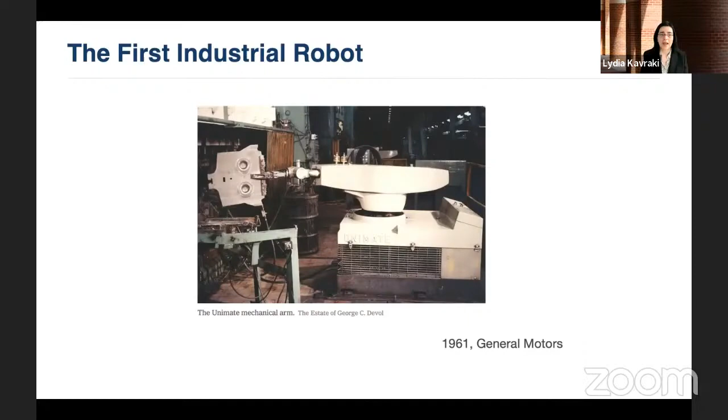However, the concept of automata is a very old one, about 3,000 years old. In the Iliad, Hephaestus, the god of metalworking and fire, created automatic tripod carts to deliver nectar and ambrosia to the gods and goddesses on demand.

Talos is also attributed to Hephaestus. A mechanical colossus made of bronze was imagined in the Argonautica. Talos patrolled the shores of the island of Crete, throwing boulders at invaders.

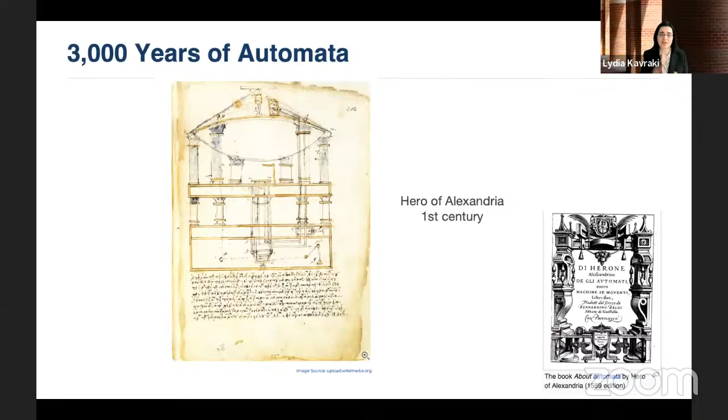In his treatise Automaton Making, the mathematician engineer Hero of Alexandria describes a fully automated puppet theater that through a combination of displaced grain, axles, levers, pulleys, and wheels could enact an entire tragedy.

Fast forward to the Renaissance, Leonardo da Vinci drew up plans for a robotic knight operated internally by weights and pulleys. In the 20th century, when industrialization became a reality, the word robot was coined in the 1920 play R.U.R., Rossum's Universal Robots, by Czech writer Karel Čapek.

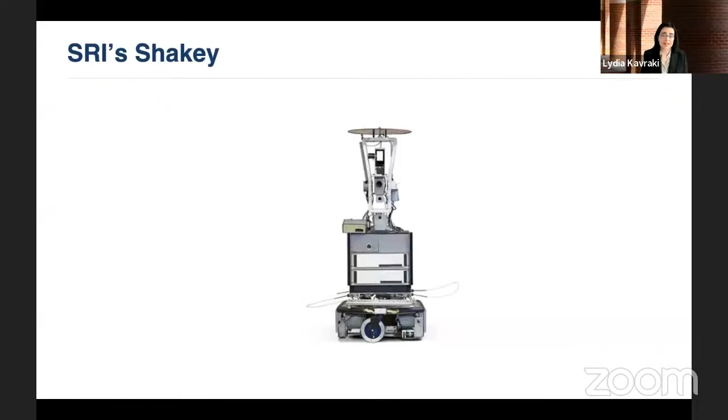Shakey was the first mobile robot with the ability to perceive and reason about its surroundings. The subject of SRI's artificial intelligence center research from 1966 to 1972, Shakey could perform tasks that required planning, route finding, and the rearrangement of simple objects. The robot greatly influenced modern robotics and AI techniques, and now it resides in the Computer History Museum.

Today, robotics is one of the most disruptive technologies. Robots have already made great inroads in the automotive, semiconductor, manufacturing, and fulfillment sectors. Robotics is now poised to transform virtually every societal sector, including national security, agri-food, maritime, environment protection, infrastructure inspection, emergency response, logistics, transportation, healthcare, entertainment, and the arts.

So the transformative power of this technology has prompted several reports and roadmaps in many countries, and I will encourage those of you who are interested in the topic to have a look at them. From Internet to Robotics, a roadmap for US Robotics, 2020 edition, followed earlier roadmaps in 2013 and 2016 in the United States and was a collaborative effort of several roboticists from academia and industry.

The Robotics in the AI Era, a vision for a Hellenic robotics initiative executed under the auspices of HIAS, the Hellenic Institute of Advanced Studies, which co-sponsors this webinar, speaks more to the Greek idiosyncrasies and reality.

From the HIAS report, I quote, "The global robotics market was valued at $62 billion in 2019 and is projected to reach $189 billion in 2027, growing at a compound annual rate of 13.5%. The market grows to 15.7 trillion by 2030 if artificial intelligence is considered."

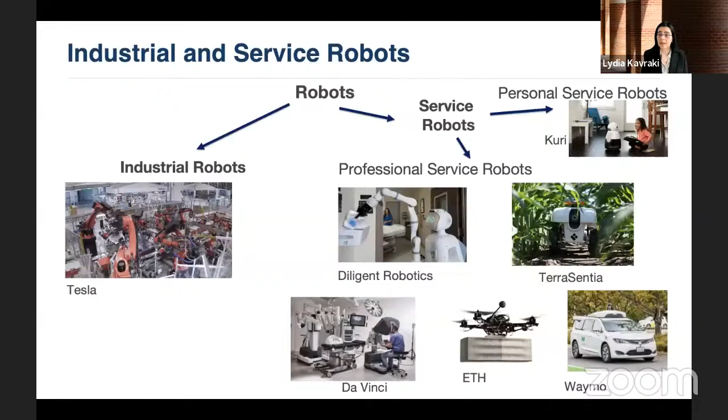Robots can roughly be divided into two main categories: industrial robots and service robots. Industrial robots are used primarily in the automotive, semiconductor, and manufacturing industry. Service robots can further be divided into personal service and professional service robots. Personal service robots include home robots and entertaining robots, while professional service robots include medical robots, robots for agriculture, self-driving vehicles, unmanned aerial vehicles, and others.

Again, from the HIAS report, contrary to industrial robotics, which is rather mature, the service robotics sector, unmanned aerial vehicles, healthcare, logistics, and agri-food robotics is in its infancy and fast rising. Professional service robots is a 27 billion market worldwide and is growing at an annual rate of 30%. Furthermore, 20% of all service robot companies are young startups. This creates an exciting opportunity for aspiring Greek innovators to enter this young and fast-growing field and modernize the economy towards Industry 4.0.

In this very short webinar, we have asked outstanding Greek scientists of the diaspora who work in robotics to give us a glimpse of their work and the things to come. We have also asked the Greek technologists and leaders in the industrial sector to discuss their efforts in Greece.

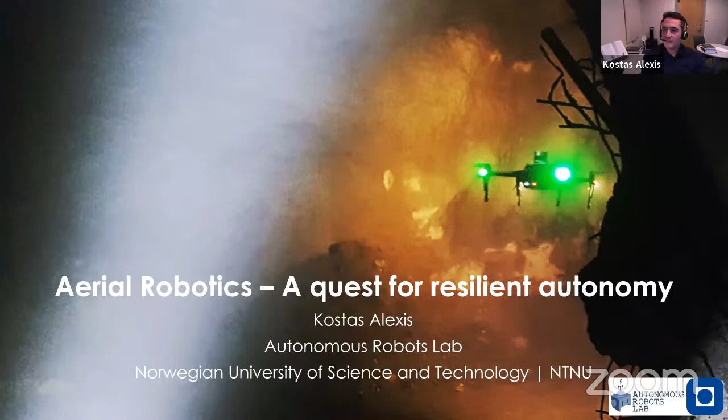I'm going to discuss aerial robotics, and I'm going to make the claim that the key aspect, and I think Lydia before outlined this also, the key aspect for service robots of that type to be ubiquitous relates to a set of challenges, and the part of the work that I want to focus on today is how we enable autonomy and a resilient autonomy in these conditions.

Flying robots are now employing diverse configurations, from classical multi-rotor systems, as we are all familiar with now, what we typically call a drone, fixed-wing systems with long endurance, custom designs specific for industry, and so on and so forth. But they are tasked to operate in very diverse and challenging conditions with perceptual degradation and other limitations that hinder the ability to operate autonomously.

If I was to make a plot of what aerial robot autonomy relies upon, I would say it has to have three features: robustness, in terms of having the same performance across conditions; redundancy, in terms of actuation and sensing, being able effectively to have the ways to operate against every error and in every condition; and resourcefulness, the ability to find a solution despite the challenges faced in all the other loops and functional subsystems.

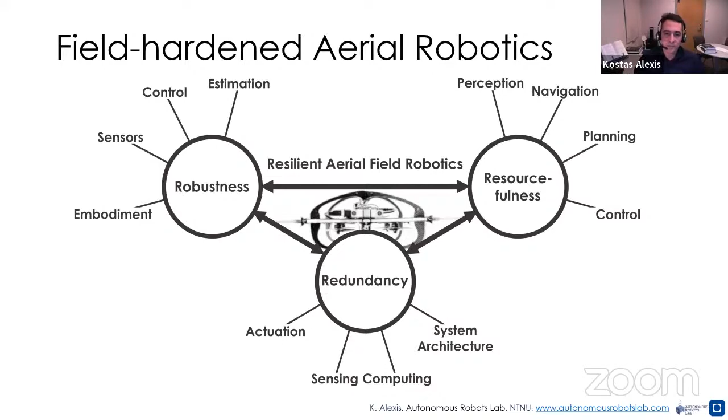It's massive. But they also have low texture and visual obscurants. They can be dark, they can have smoke, they can have dust, and so on and so forth. There is no access to communications. So we're really talking about autonomous systems. I'm going to present the main part of the work that relates to our contributions, but the whole context is made through a large team and international collaboration that involves many partners.

And the name is inspired by ancient Greek mythology, so it's called Cerberus, by the protector of the underworld. I got to know through this endeavor that actually underground domains are particularly important for the world and the society, and also very diverse. So we have tunnels and tunnel-like environments such as mines that give us the resources, urban underground infrastructure that allows us to transport, and of course, the magical world of cave networks.

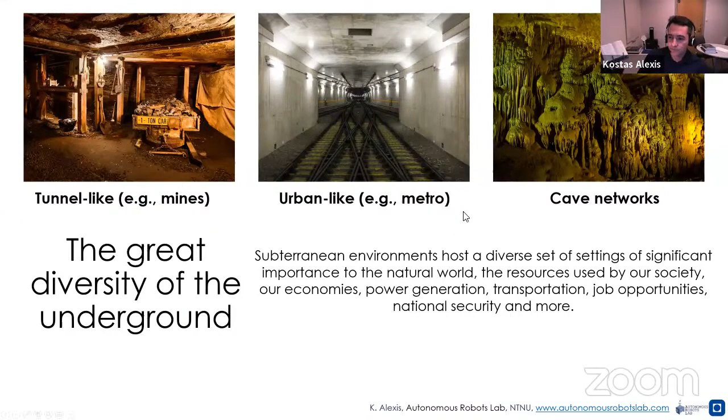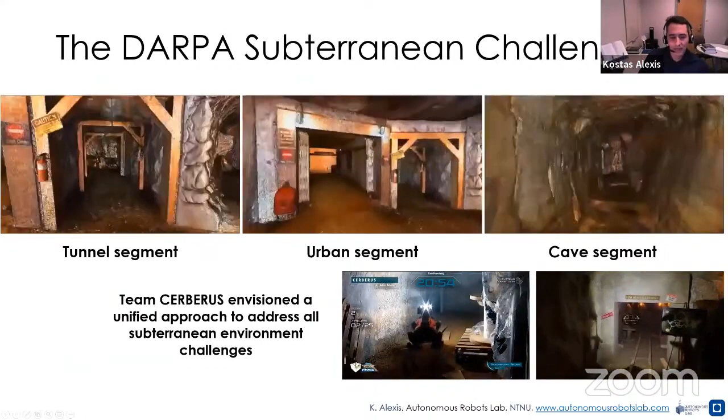DARPA, the US Defense Advanced Research Projects Agency, implemented a challenge analogous to the previous, like the DRC and the Urban Challenge, where robots had to explore and map and find objects in this type of diverse environments. In the final event, teams were tasked to explore parts that look like an underground mine, parts that look like an underground urban environment, and parts that were part of a natural cave. And we deployed a system of systems involving flying and legged robots. Legged robots were based on our collaboration with the team from ETH Zurich.

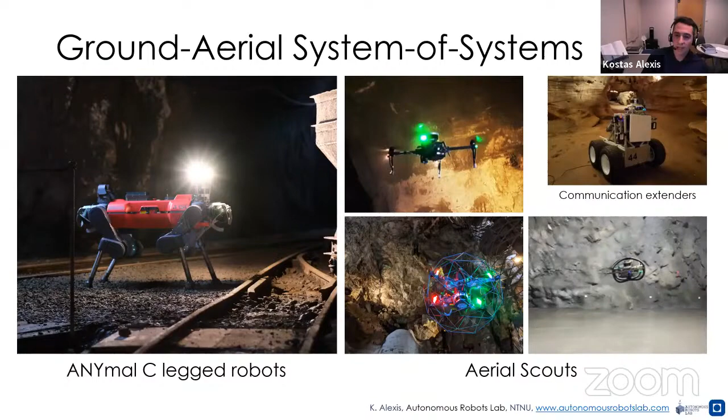To approach the problem, we think it's necessary, and this is what I want to coin here, that you need to perform holistic research across the domains of dexterous design of robotic systems and agile flying robots, resilient perception, resilient autonomy, alongside the remaining task-specific work such as detecting objects or enabling, of course, communications throughout. That's a picture of the systems we deployed in this competition. And again, I focus here on the flying part, although the legged robots played a particularly important role at the final event of the competition.

Flying systems, speaking in terms of what are the core challenges, I think there are three. The embodiment has to be resilient, perception has to be resilient, and autonomy has to be resilient. A key aspect in our experience that allows for resilient embodiments is to make a design that is forgiving to last resort errors that can always happen. For example, in very confined environments, we can always collide a little bit with the world. So collision tolerance and other compliant designs are the means to facilitate such resilience.

And if such a design is available, then we can build upon the more important functional autonomy loops that allow it to operate on its own, search, characterize, and explore unknown environments. These are some instances from previous robots of my team. People, of course, traditionally have worked for a long time on control systems, flight control for these systems. And in my team, we employ a particular methodology called model predictive control.

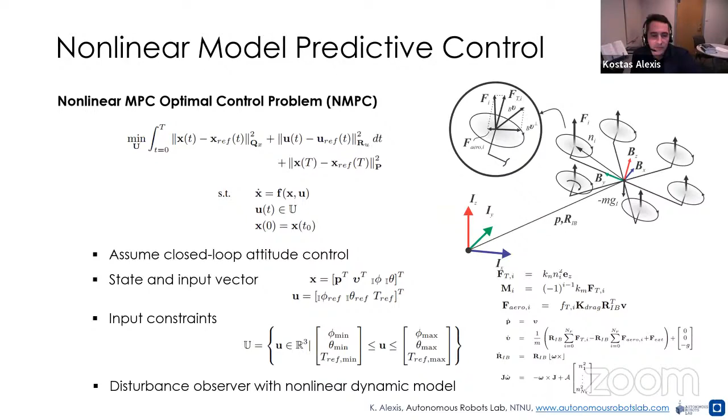Beyond control and embodiment, I mentioned perception is a key challenge. GPS-denied navigation is something that colleagues in the research community have explored heavily, either using LiDAR sensors or visual cameras and so on. My focus the last years on this topic related in particular to what we call perceptual degradation. What we faced in the Subterranean Challenge, but also in other conditions especially relevant to industry in the real world, is that robots do not operate in environments that are benign with simple features and good visual conditions, but they can be simultaneously GPS-denied, dark, low texture, with smoke and fog and mist, geometrically self-similar, multiple kilometers in size, but at instances extremely narrow.

To allow resilient localization and mapping based purely on onboard sensor data for flying robots, we have developed a multimodal localization and mapping pipeline that first of all implements the sensors, which is a lot of effort in the hardware, as Lydia mentioned, to miniaturize everything for a small flying robot, to be able to see through degraded conditions. And here you see the benefits of thermal navigation, where the robot is unaffected by the presence of strong clouds of dust around it.

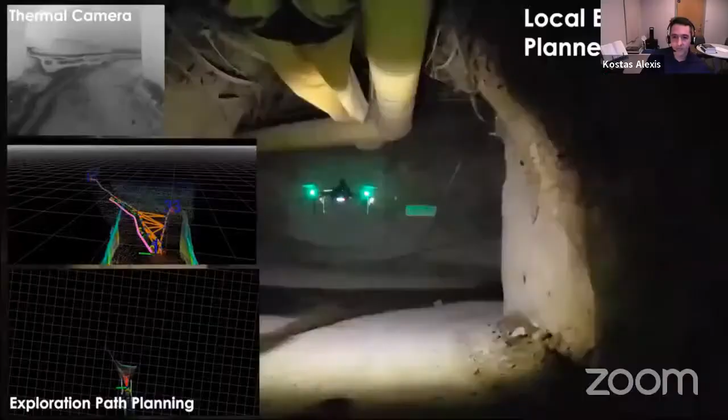ability to exploit the agile dynamics of flying robots, which can seamlessly navigate through the 3D space, and do so in a manner that works for a single system, but also works for a team of robots that have to undertake this exploration mission and mapping as a team, collaboratively.

These are instances of these results where you see one of our flying robots exploring an underground mine in Nevada. And you see the thermal data and the LiDAR data. And these pink paths are the paths that the robot has identified to navigate on its own in order to explore the remainder of the environment. And the robot eventually, by the end of the battery life, makes sure to come back to its origin and deliver the data to the people that wait for it outside the underground mine.

This methodology in perception and in path planning was the core, the autonomy core of Team Cerberus, and in the final event of the DARPA Subterranean Challenge allowed us to win the competition, a result that I'm proud of, not for myself mostly, but for my team as a whole, which managed to compete and win against teams from NASA and MIT, Carnegie Mellon, and others who had an inferior score in the last phase of the competition. And this was truly a big challenge for systems walking or flying to be resilient and autonomous throughout, and it involved 3 challenges with different geometries at any time.

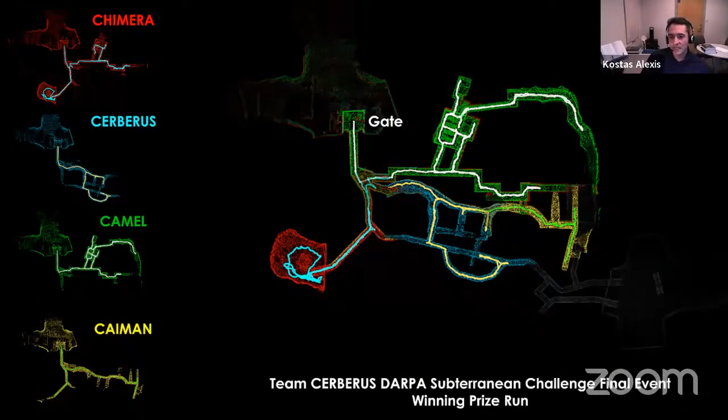In this map that allows us to see the whole picture, you see 4 robots with 4 names: Cerberus, Chimera, Camel, and Caiman, taking paths in this complex underground topology and exploring these worlds. And eventually they deliver the map, but also the location of objects of interest in this map. And just for what it's worth, you get a point in the competition for detecting an object correctly, reporting back the location with an error of up to 5 meters. So it was a task about navigation in austere conditions, mapping and detecting objects of interest.

And the combination of walking and flying reflected the fact that ground systems, of course, have endurance, walking systems have dexterity against some terrain, but at the end of the day, when you have to go vertically up, get the bird's eye view, you also need the flying systems together. So that was a team that involved multiple robots, and this is the whole combination of robotic systems that Team Cerberus deployed through the 3 years of the competition.

I want to close my talk highlighting that remote observation and mapping or search for objects is one thing that flying robots can do. It's really not the only one. And what you see in these videos is that we can, of course, exploit physical interaction to navigate through very confined environments.

We are recently running a project that allows to go through very narrow manhole settings where a human actually is able to navigate by just squeezing his shoulders, or to manipulate physical objects in the environment with a flying system. This is maybe not the most conventional application, but actually, if you think about it, it's very natural to the natural world, with birds, of course, being able to manipulate and interact with their environment.

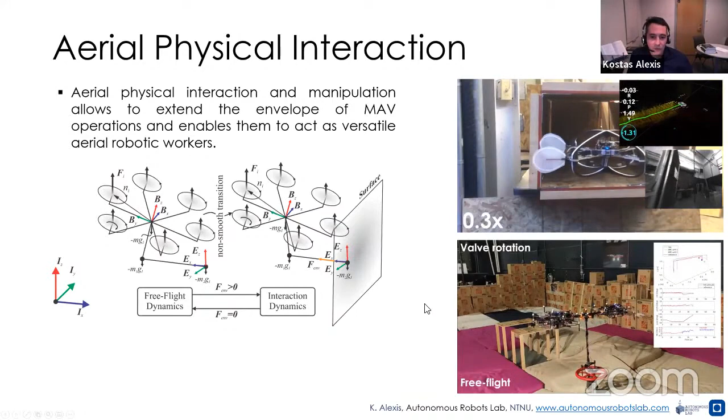And of course, beyond small flying systems, I have to give credit to the period of the research that I was at ETH, together with my team back then, when with traditional fixed wing designs, glider, we demonstrated the ability of a system to fly during the day, charge its batteries with solar panels, and sustainably cross the night, and then fly the next day, and the next day. And eventually we call this the idea of perpetual flight.

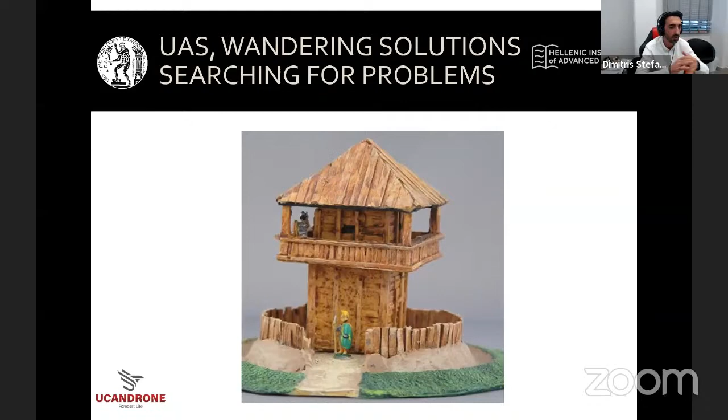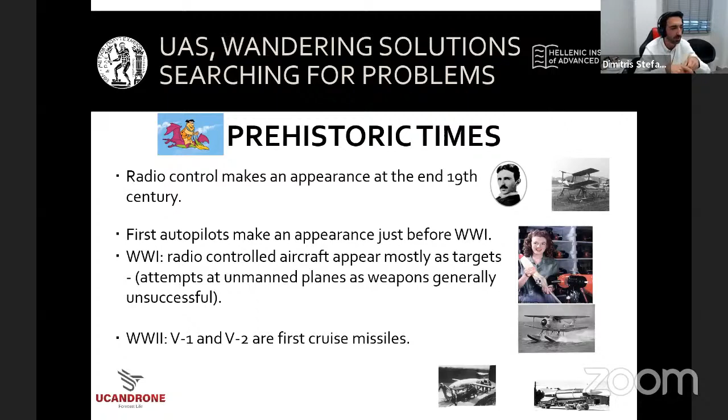So we had some prehistoric times. The lady on the right, if you don't know it, is Marilyn Monroe handling a propeller from a target drone. Well, the first attempts in the 19th century were, again, the defense industry playing with cool toys doing bad stuff. But after that, we have some medieval times where, after the war ends, the remote control hobby became mainstream.

And actually, if you think about it, today's drone scene is largely a continuation of this tradition, but with better electronics, of course. Like every history, we have the Renaissance. In the 90s, GPS became mainstream. We have the mobile phone hype, and of course the internet facilitates the open source movement, or at least I can send a colleague of mine a message and they can answer. But we're not there yet.

Why? Because we have the age of enlightenment, and of course we can get hands-on some real energy. Because of the battle of mobile phones, we have inertial and other sensors and GPSs that are small enough and cheap enough to use. And for the first time, last but not least, we have processors that we don't use for heating ourselves, but they can actually process.

So around 2005 or 2009, somewhere in the middle, we start having all this hype about drones and all this open source initiative for flying drones, for USVs or UXVs in general, that we can play with, use, or make a hobby out of. And of course, academia embraced them and started to use them a lot.

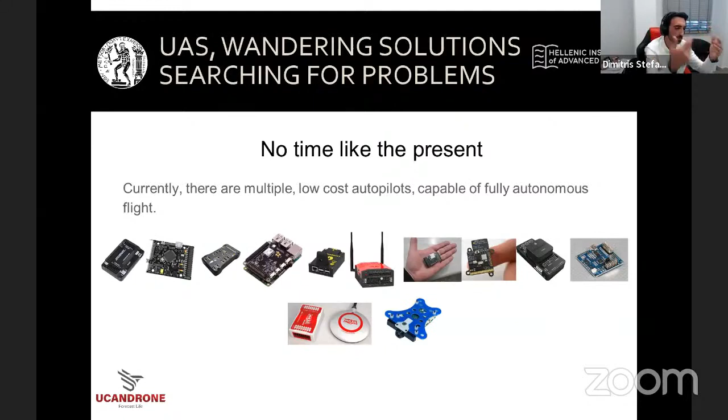So as I said in the beginning, there is no time like the present. Nowadays, we can get hands-on with whatever device you can imagine. You can have sensors of any kind, and you can just imagine a solution and make it the other day. But after this perfect storm, we sat down and started narrowing down to the tool, not the solution.

We heard about coding, AI, and buzzwords like machine learning, etc. So we narrowed down to the code, or we said, of course, we need more miniaturized electronics and better sensors, etc. Or guys like me said, okay, none of you can do anything if you don't have a beautiful shiny platform like mine. And everybody looked at his discipline without looking at the solution. And once we found this panacea, we handed it to everyone who's willing to pay for it.

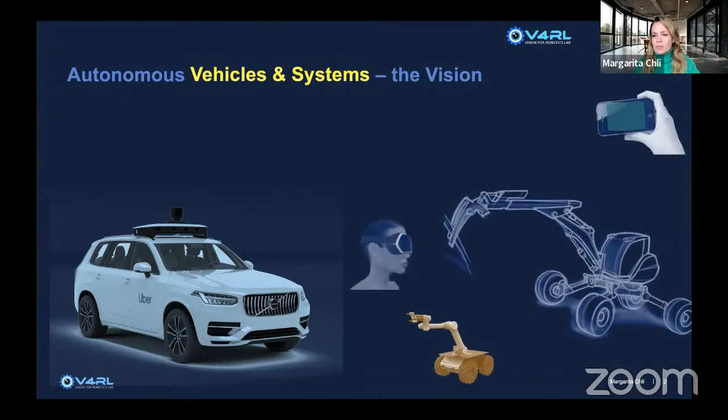Good, so I'm going to talk about autonomous vehicles and systems with vision, and the pun here is intended to mean both orasi and orama, so both machine vision and vision for the future with respect to this topic. Now, when you hear autonomous vehicles and systems, I bet most of you think about autonomous cars. But I would like to open up your horizons to think a little bit broader about what kind of vehicles and systems we are working with. There are so many other robotic platforms that one can think of.

And at the Vision for Robotics Lab, we are aiming to basically use the onboard sensors and the onboard computation in order to automate their navigation in space. So we want to develop this robotic perception and intelligence for platforms such as the ones that you see here, in order to enable their safe navigation in space without colliding with their environment and actually performing a useful task.

And the vision would be to take this a step further, even to have a portion of this team, or all of it, if you would like, to collaborate in a team to perform a common task together. Now, again, a team like this or a sub-team of such platforms, you can imagine that it can be very helpful for different tasks. Whether one wants to digitize an archaeological structure, to have a team to help in search and rescue, or to inspect the power plant or monitor crops, then robotic perception and systems can have a lot of impact and have a lot to offer.

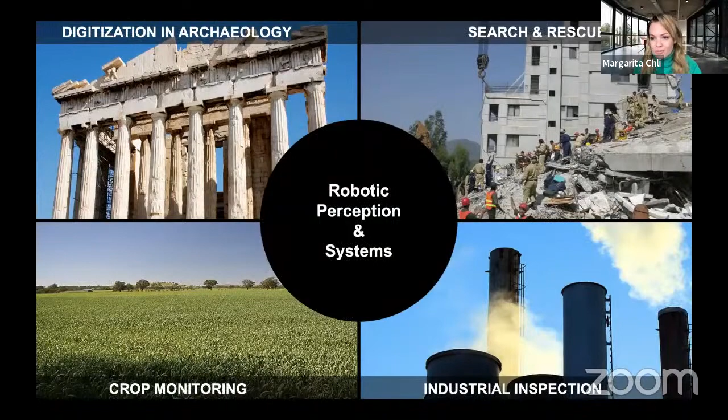So back to our vision. So in order to achieve this vision, to have a team like this that is able to assist us in tasks as the ones that I showed before, then we have quite a few challenges to address. And for the purposes of this talk, I've partitioned these challenges into three main topics, basically. And these also represent the three main research streams in my lab. So I'm going to go through them and explain what I mean by these challenges and give you a taste of some of the works that we are doing to address them.

Right, so what do we need for our autonomous vehicles and systems? First of all, we need them to be able to robustly estimate their ego motion in space, and also estimate what this space, what this scene looks like. Then we want them to build on top of that a level of intelligence, if you'd like, to perform scene reconstruction such that they can interact with their scene, and also path planning in order to perform a mission like drive from A to B autonomously.

And once we have robots able to address challenge 1 and 2, then we would like to exploit the fact that multiple robots might be deployed to perform a common task in order to do multi-agent collaboration. Okay, right. So let's look a little bit into what we mean with ego motion estimation. I'm glad most of you have knowledge of Greek, so you can understand what ego motion means just by reading that.

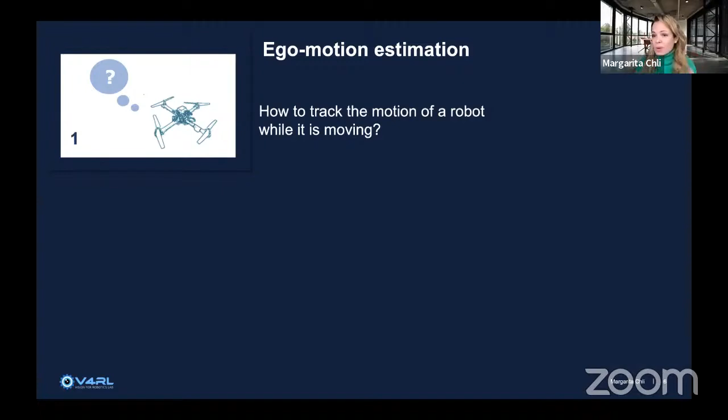But the main idea is how to track the motion of the robot while it is moving. And when you pause and think about this for a minute, you might say, you know what? I know what I'm going to do. I'm going to strap my phone on the robot that I want to track. I'm going to switch on my favorite Maps app, and I'm going to keep tracking where my phone, and hence my robot, is within this map, right?

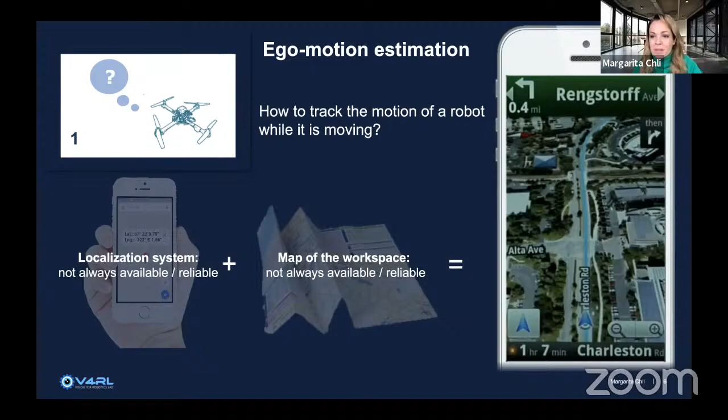But of course, this has quite some assumptions underlying there. So for example, we assume that we have a good localization estimate and a good estimate of what that map looks like. And of course, you guessed it, we cannot always rely on a good localization system, for example, indoors, and we cannot always rely on a good map because the world changes, buildings get demolished, new ones get built, right? So how do we do this? Well, we use onboard sensors, and I invite you to think about the sensors for the moment, or the rest of this talk if you'd like, to be a camera.

And for short, in the community, we refer to this problem as the problem of SLAM. And that's exactly our first challenge. How can we robustly perform SLAM for our robots?

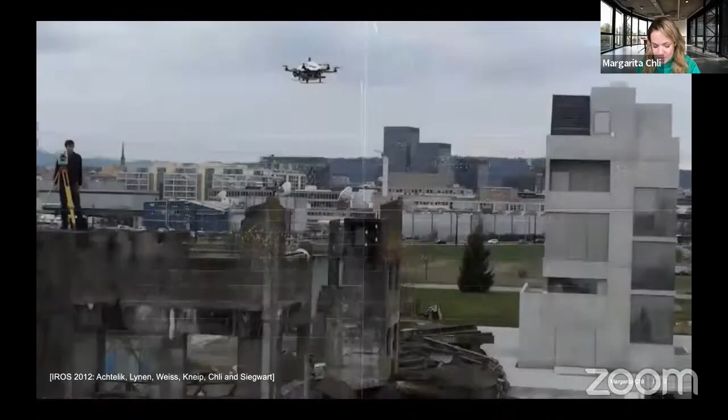So here is an example, and my God, this work is 10 years old. It's the first time that we were able to show that we can automate the flight of a small aircraft like this using a downward looking camera and an inertial sensor. So here you can see the view; the map that the robot is building is very different from your typical maps that you use in your favorite apps, but it's enough to localize where the robot is and how it is moving in space.

Now, in order to capture a video like this, there has been a lot of tuning happening, which brings me, of course, to the point that while we can see a very nice video like this, autonomy is still a big challenge. And for this reason, we resort to different research directions. One direction is to experiment with different sensors.

For example, event cameras. Event cameras are inspired by human vision, by biological vision, if you'd like, and they capture changes in the intensities of an image. And what is great about them is that they can give us an insight into what happens in between traditional camera frames. They don't give us frames, they give us events, just to tell us where these little pixels are changing in the image. So if I was moving in my video here, you would be able to see just the boundaries of my figure.

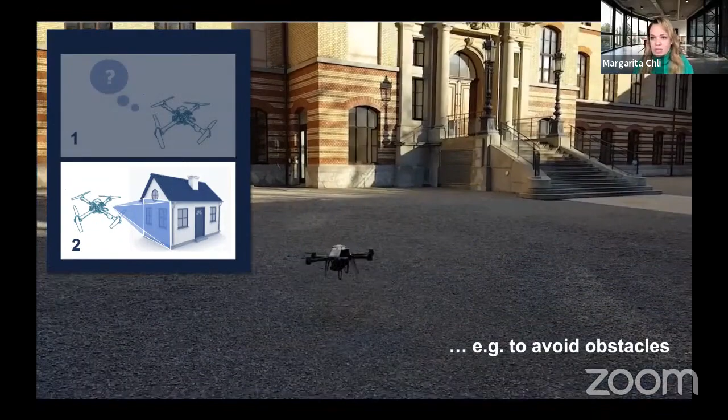But a key word here is that this map so far has been sparse, which brings me to the second challenge that we are dealing with, scene reconstruction, such that our robots are able to reach out and grasp an object or to avoid obstacles while flying. So imagine a robot that is intelligent enough to override the pilot's commands when he or she is driving it through a wall. So how can we do that? We need to build denser maps for this.

We present a path planner for 3D reconstruction of large scenes for an MAV equipped with a gimbal-actuated camera. Potential next best views are sampled from the MAV's configuration space and ranked by their expected information gain. The information gain of a proposed viewpoint is calculated with a raycasting operation and encodes visibility of frontiers, visibility of unknown space, as well as quality improvements of the reconstructed surface.

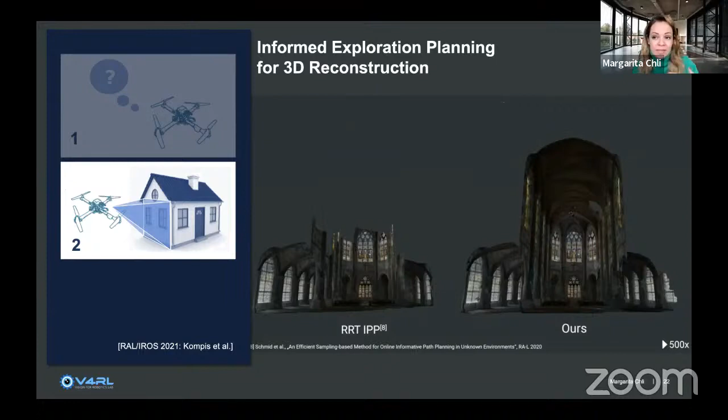So with works like this, we're able to push what we can do in terms of quality of reconstructions, but also speed of reconstructions. And within the same umbrella of trying to build more intelligence into our robots, we also use semantics. We can use semantics when driving a robot from A to B, for example, to avoid areas that can be difficult for a robot to perform its estimates of ego motion and scene estimation.

In the interest of time, I'm going to skip forward to the third challenge on multi-agent collaboration to show you a taste of what we do here. So imagine having a team of drones that is taking off and knows nothing about the scene. They start running SLAM on board their own processors, right? As I explained before, they're building their maps, and before forgetting their maps, because they have limited space on board, they're sending all this information down to a server or up to a cloud, if you'd like, that acts as a bookkeeping entity.

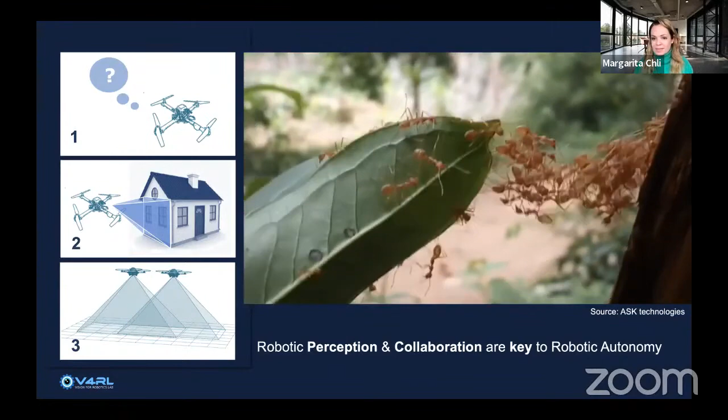Right, and I used most of the talk to show you videos with respect to drones, but the extension to other platforms is also feasible. And indeed, we have some examples with automating train navigation, with having phones to use to play games in the virtual world, and it's all using the same basic notions that we've seen in this talk.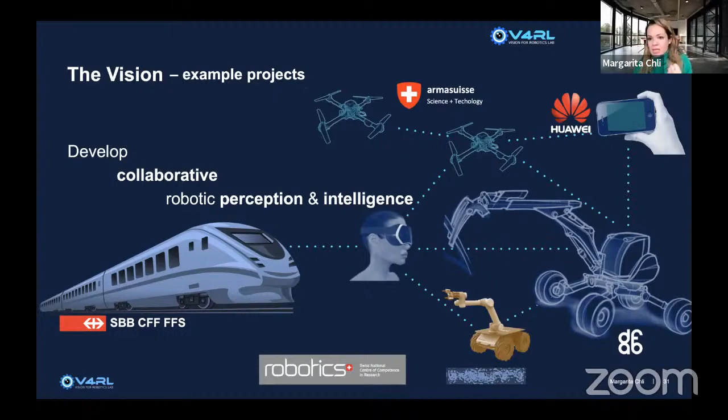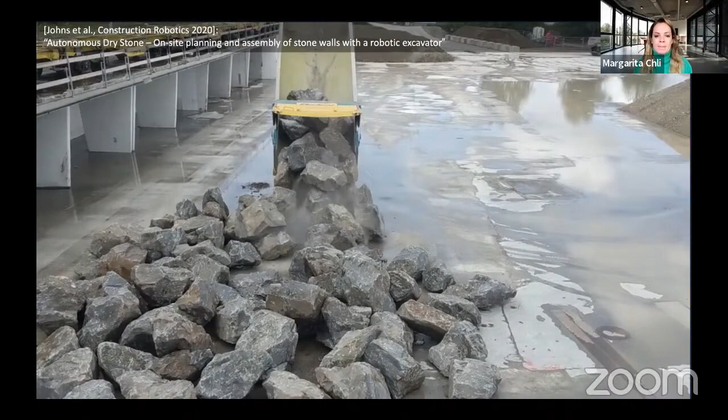And I have one last video to show you with this autonomous excavator. I think it's pretty interesting to see. This is a joint effort by roboticists and physicists and architects. We joined forces to use basically an autonomous excavator equipped with lidars and cameras to build a wall out of locally sourced stones like these.

So we are scanning the environment, and then we're using a physics simulator running in the background to figure out how to place these stones such that we're able to build a freestanding wall using this autonomous excavator. And within the course of several days, we were able to build a wall. You're going to see it in a minute.

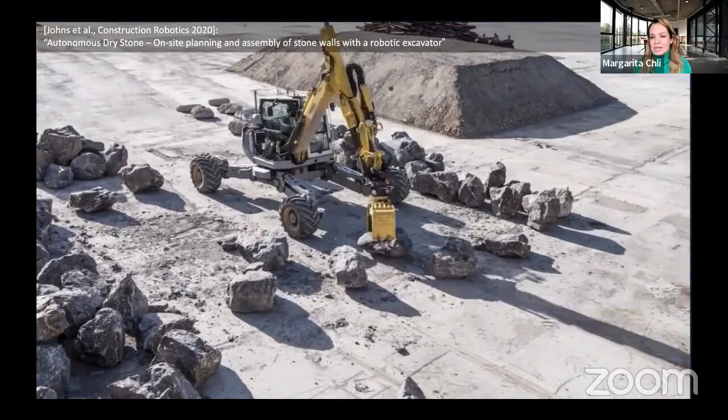It doesn't look very nice, but I think it's interesting to see what robotics can do, what robotic autonomy can do. And imagine having had two robots able to build this, right? All the challenges and opportunities that would have to go on there.

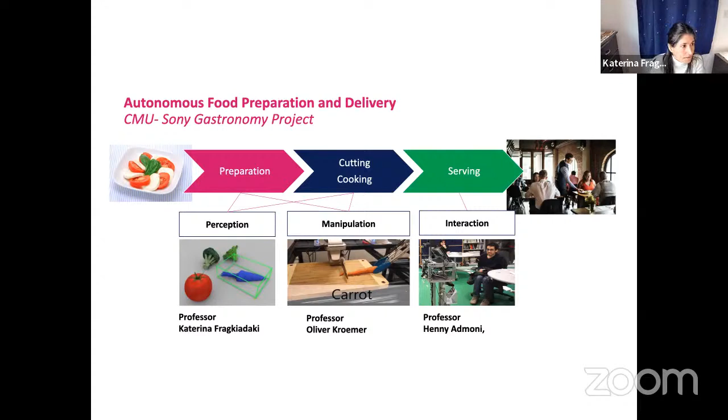We are three professors on perception, manipulation, and interaction. So all the way from seeing the ingredients, trying to arrange them, cut them, put them on the plate and serve them to the end user. Of course, right now it sounds like science fiction, but this is what we're working on. So I want to discuss open problems today, and this will also give us the opportunity to discuss the solutions we're trying to pursue.

So one clear problem is, how do we understand and generalize beyond the training distribution? How can we have robots that have common sense, understand temporal and causal associations between concepts, and can transfer this common sense across multiple environments and tasks? This is absolutely necessary if the robot is to act without being instructed by the human. If you see a person fainted on the floor, you need to call 911. You are not supposed to be instructed.

We also want to be robust to adversarial users, or to users that are tired, users that leave out a lot of information, and so on. Common sense about the world is absolutely necessary for humans and robots to understand one another. And interactive learning: how we learn on the task instead of just training the robot and then deploying it. So I'll sprinkle in some projects that are going on in my lab in those directions.

So one direction we have is how do we build these embodied assistants. This is our first version of TIDEE, teachable, interactive, decluttering, embodied explorer, which is essentially a little robot that goes around your house, detects objects, and figures out if they're in or out of place. And if they're out of place, it takes them and puts them in the right place.

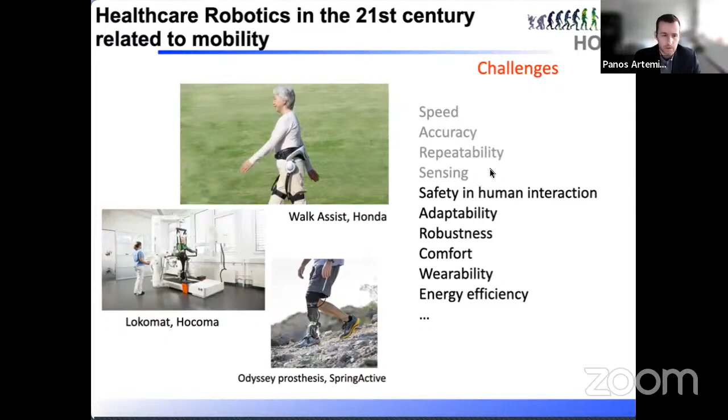And, of course, energy efficiency. Nobody wants to be plugged into the wall when wearing a robotic device or a prosthesis. So we're talking about batteries and energy efficiency of those robots. So definitely the challenges in robotics have evolved through time, especially as robots come closer to humans and are worn by humans. How important is this problem? How important is the problem of mobility and how robots can help with that?

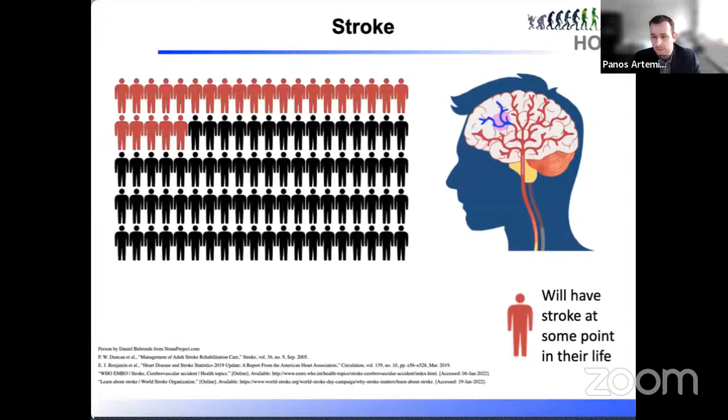That mobility is affected. If this figure here on the left represents the world population over 25, unfortunately about 25% of them will have a stroke in their lifetime. And a third of them will unfortunately die due to complications of stroke. And the remaining 2/3 will need some kind of assistance and some kinds of rehabilitation. So the question is how robots can help with that.

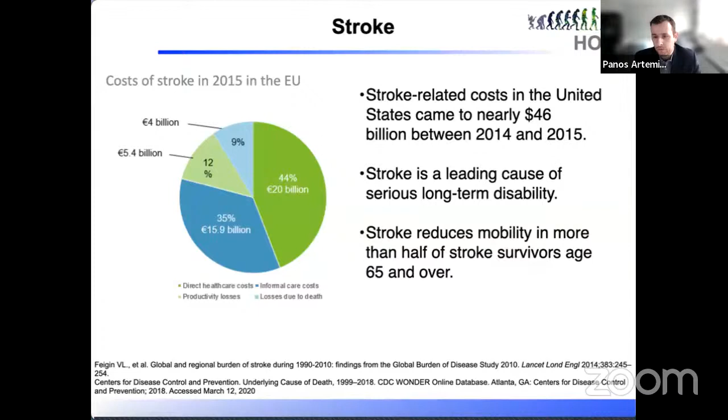So along those lines, this is the mission of my lab, the Human-Oriented Robotics and Controls Lab, which essentially can be summarized in improving the quality of life and work by developing, modeling, and controlling robots that physically or cognitively interact with humans. We have done a lot of work with lower limb prosthesis. I'm going to present briefly today mainly rehabilitation robotics, how we can use robots to rehabilitate after a stroke. And we have been doing a lot of work on how humans can interact with multiple robots through brain interfaces.

So starting with rehabilitation, the news is actually good for upper limb. This is something that started back in the late 80s from MIT Manus and the MIT group on how we can use robotic devices to rehabilitate upper limb motion. And this has been doing very well. Now there are multiple hospitals around the world that have robots that are actively used almost every day to rehabilitate patients for upper limb motion. And actually the latest American Heart Association report says that they recommend robots for upper limb rehabilitation.

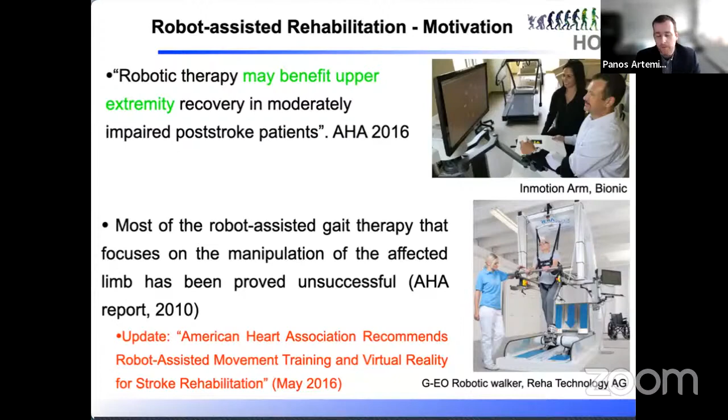Lower limb is a completely different beast. Walking is much more challenging. Right? It has to do with balance, has to do with transfer of weight. And unfortunately, the reports are not good so far. The robots that have been used so far in rehabilitation for lower limb have not been as successful as for upper limb. I would like to make a claim here that so far, all the robots that have been developed for lower limb rehabilitation have been passively moving limbs. And we know from the neuroscience and the neuroplasticity of the brain that this is not going to work. Passively moving the limbs in order for a patient to walk is not going to lead to rewiring the brain.

The brain has a very nice property that has to do with neuroplasticity. It's able to rewire and reconnect itself or different regions of itself. But this cannot be done with just passive motion. So you have to engage in more dynamic, more forceful interaction with the robot in order to engage the brain and rewire it.

So let me start with a goal, or really a bold idea that we had about 8 years ago: how we can provide therapy for the paretic leg. Remember that stroke is usually hemiparetic, so one of the two sides is affected, the other is still intact. So the idea was how we can provide therapy to the paretic leg by using physical interaction with the healthy leg. So now we're not messing around with the paretic side, we're actually engaging with the healthy side. And this is based on the fact that those two legs need to collaborate in order for us to walk. The brain is involved in interleg coordination mechanisms. And is it possible to provide rehabilitation and rewire the brain by engaging this interleg coordination that is still active after a stroke?

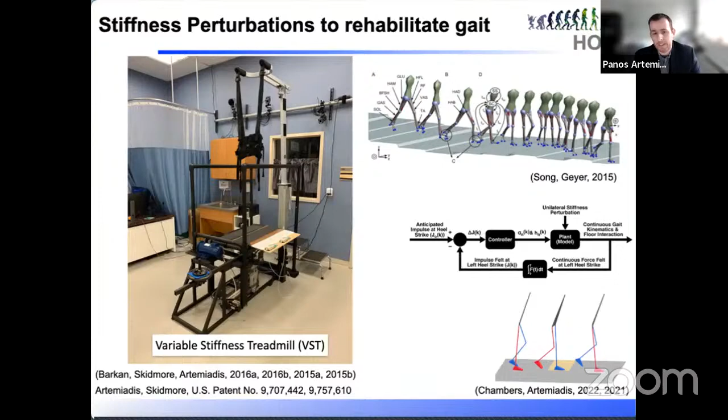We actually started with a model that was already available back in 2015 from the group in CMU. This is a really complicated model. It has at least 12 muscles for each leg. It includes neural pathways, both high level and low level. And then we added what we call the high level controller on that model, in order to model what really happens in this variable stiffness treadmill and what happens during the process of engaging one limb and having the other limb reacting to that.

So you see here on the top left a video of the actual treadmill and how you can unilaterally change the stiffness underneath the left leg. On the bottom, you see how our new high-level controller included in this neuromuscular model can actually result in a model behavior that very closely resembles the human. And this is the first time that we saw that a very complicated neuromuscular model that explains how the brain controls walking can be retrofitted to this idea of variable stiffness, and it can actually match what we see with real human subjects on the treadmill.

So then we did the next obvious step, which is, now that we know the model of this process, can we try to optimize it to provide rehabilitation? So we did an experiment where we have repeated stiffness perturbations, and the holy grail in rehabilitation is the after effect. So you do this training session with your subject for 10, 15 minutes, 30 minutes. What's the after effect? They would just walk away from the lab and walk as bad as they came in. So we are focusing now on characterizing this after effect.

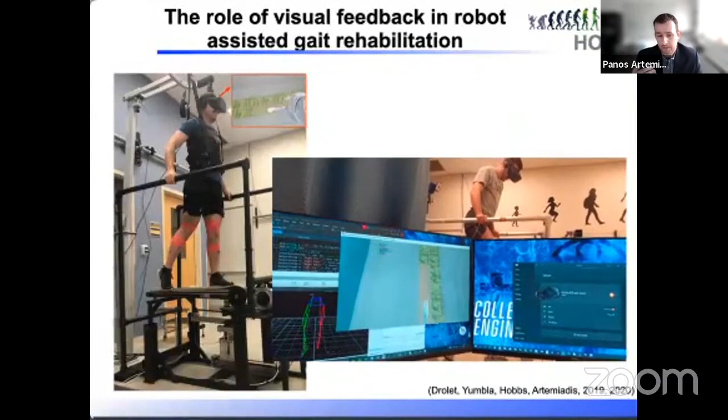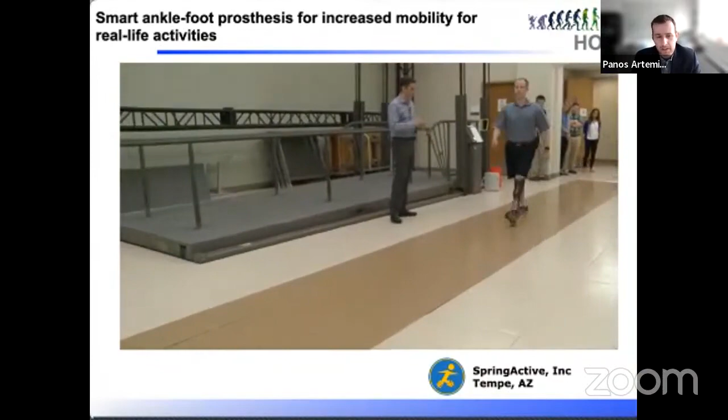So since I only have a few minutes, let me switch to the second project, which has to do with prosthesis. This is actually a collaboration with industry. NSF has these unique mechanisms to fund projects in collaboration with industry. So now we have partnered with SpringActive from Tempe, Arizona, for the controller development of their prosthesis. This is a lower limb prosthesis that they developed, and what we are doing is improving its controller so that it is robust in dynamic environments.

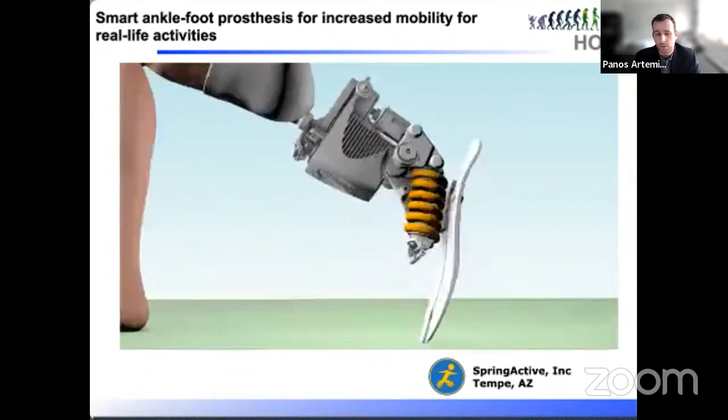And what I mean by dynamic environments is along the lines of this variable stiffness treadmill device that we have in the lab. What happens when you walk on very soft environments? Not only hiking on uneven terrains, but also very soft environments. So you can imagine yourself walking on sand on a nice beach in Greece, where you have a highly compliant, highly dynamic surface. What needs to be done with the control of this prosthesis in order to be robust and safe for the user when we transition between those dynamic environments?

So a work that actually was submitted literally a few days ago has to do with how we take a well-established model. This is called the 3D dual SLIP model that is mainly used in bipeds, in locomotion robotics. How we transition that model, how we extended that model to compliant surfaces, and how then we design a controller that's essentially an optimized LQR controller that has to do with pre-stiffening: you adjust the stiffness of the legs, and that proves to be robust and actually guaranteed stable in terms of walking on very soft surfaces.

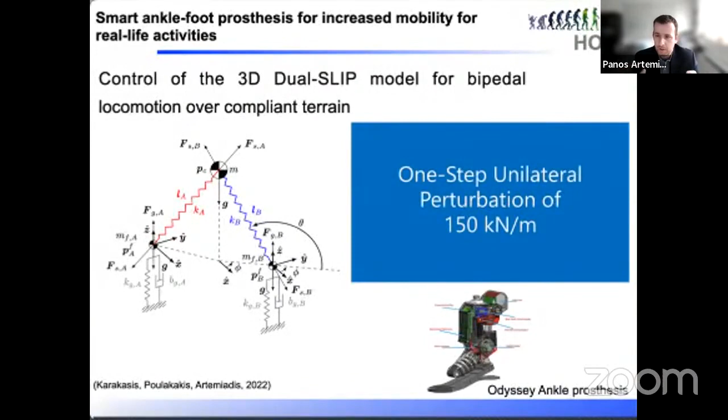We actually tested the system in simulation, and we saw that the range of compliance that you can achieve is really big. You can go to a surface that is about 30 kilonewtons per meter in terms of stiffness. Just to give you an idea, a very soft mattress, like a gym mat, is in the order of 60 kilonewtons, so we can do much softer surfaces than that. So this is a work that we just completed in simulation. Now we're transitioning to implementing that idea of pre-stiffening your leg into the actual prosthesis that we have in the lab.

Lately, we have been also working on how to introduce the human in the loop, how we can use signals that are coming from the muscles of the residual limb when you have an amputation to intelligently control the prosthesis, again, in terms of transitioning to different surfaces and different compliances.

I will stop here by thinking about the future. What are really the challenges for healthcare robotics, and especially those robotics that have to do with mobility? One important thing is inherent safety. I don't want to wear a robot, or I don't want to have a prosthesis that will not be safe, even if it loses power completely. So we're thinking about safety, not only in terms of control, but also in terms of the hardware. That's why there's a lot of hype around soft robotics lately.

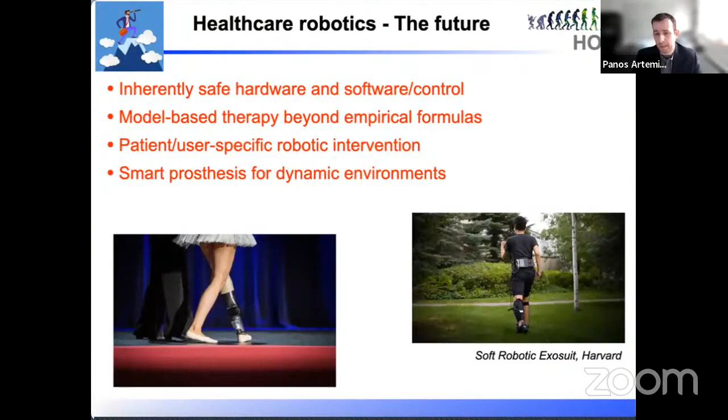I'm a big supporter of the idea of model-based therapy. I think we need to go beyond the empirical formulas for medicine and for providing assistance, and go and do some really model-based work in order to optimize our interventions. And in terms of prosthesis, we need to think about controlling those prostheses in a better way to be robust in dynamic environments for everyday life tasks.

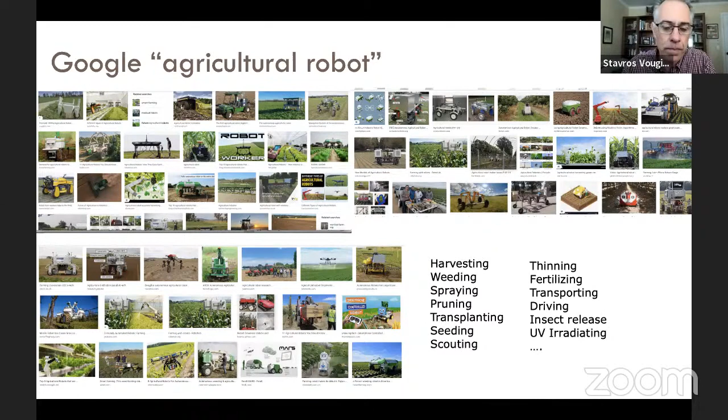So if you go and Google agricultural robot, which is what I did yesterday, and print out some of the images, you will see a lot of different robots out there that are intended to do harvesting, weeding, spraying or pruning, seeding, thinning fruits and flowers, fertilizing, transporting, anything you can imagine. You will find a robot that is aspiring to do that in commercial agriculture. Now, what is driving the need for all those robots?

Well, these robots are offering precision sensing and actuation services. And there are two main application areas for them. One is precision farming. Precision farming is about applying the right type and amount of input, for example, chemical, at the right time, at the right place. The goal is to maximize production, minimize the inputs, and do it in a sustainable fashion so that we reduce the footprint of the technology on the environment.

So this is one of the major drivers. The other major driver is the reduction of manual labor. This is a huge problem in most parts of the world. We actually need to either replace farm workers or work with them and increase their efficiency.

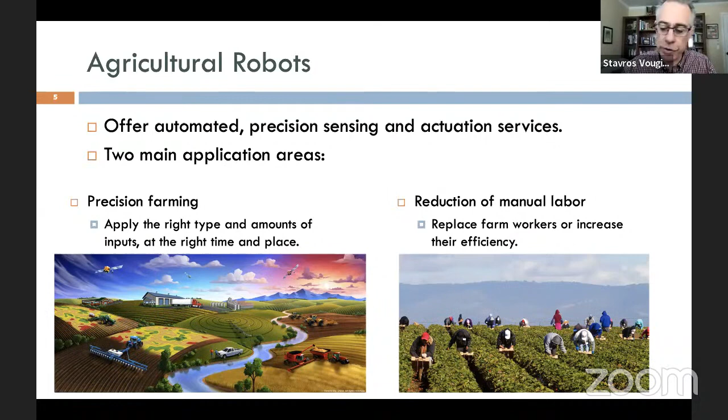Now, in terms of precision farming, and because I understand that some people in the audience may be interested in startups or in translating the research into industry, precision farming has two different domains. One is the large row crops, soy, corn, wheat, etc. This area is dominated by large equipment manufacturers, and automation is mostly embedded in their machines. And all of those machines are GPS guided because it's pretty simple to navigate in open space pretty much without any obstacles.

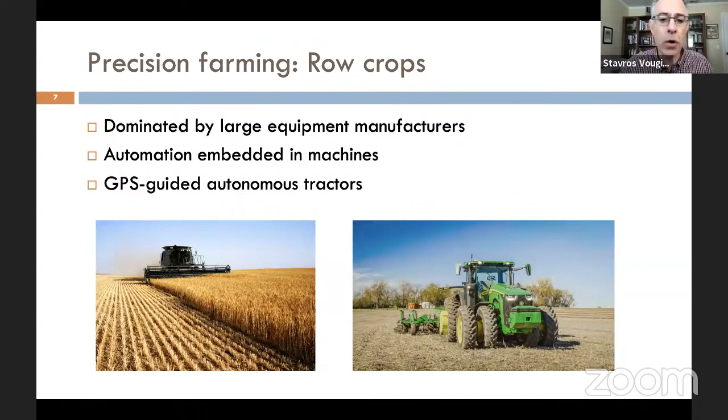On the other hand, when we deal with specialty crops, fruits, vegetables, vineyards, orchards, this space is dominated by startups, mainly because the market is very fragmented, but the challenges there are different. And I think that this is an area that's very relevant to agriculture in Greece because Greece is all about fruits and vegetables. And in this space, there are lots of companies developing different types of agricultural robots.

All of those robots have to be sensor-based, sensor-guided, not GPS-guided, because they have to avoid obstacles, operate under dense canopies, so there is actually no GPS signal. So precision farming is one area, and then the other area that I will talk about is labor.

Now, when it comes to specialty crop challenges related to precision farming, we face sensing challenges. So the plant structure is typically very complicated, and there are problems with visibility. You can't see the fruit or the part of the plant that you want to treat. We also have a lot of biological and environmental variability in those crops, and we have a lot of complexity and variability of plant responses. So if you're building a robot that needs to, for example, take images to diagnose a certain disease and then apply the right input, it's not very easy to do so.

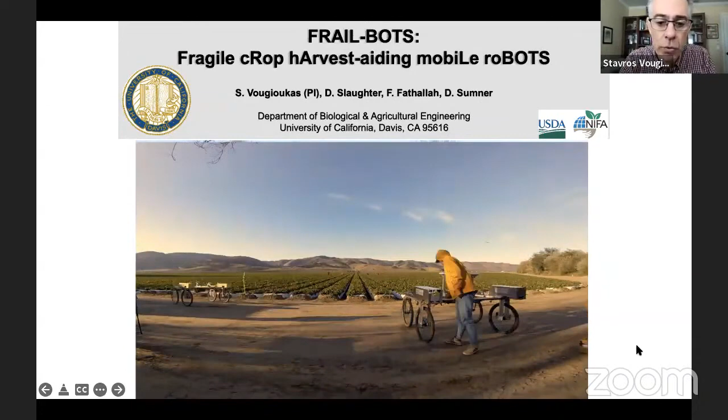And this is the actual result after a few years of work. This is, of course, fast forward. We built a couple of robots that go out to the pickers. They actually start going before a picker needs them. They show up when the picker is done. The picker puts their tray on the robot, just as you can see here, and then pushes a button. The robot goes away. It's all autonomous. So the picker doesn't need to walk.

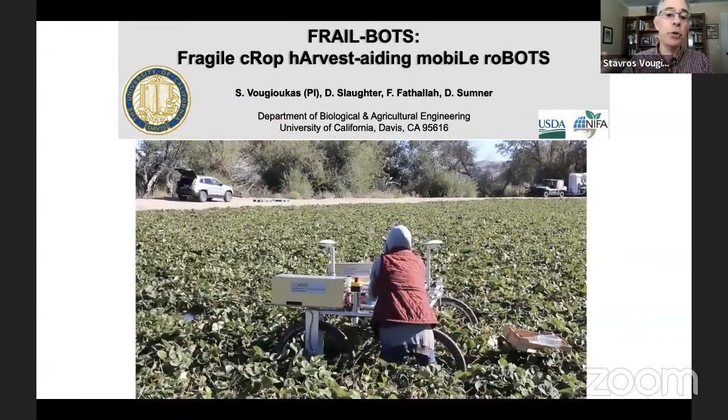They just pick. Now, developing such a system was not a trivial task, both in terms of engineering, but also in terms of software and algorithms. This is a system where basically we exploited the fact that the pickers use a small cart in order to pick. We instrumented that cart so that we could measure the picked strawberries in real time, the weight of the tray. That data was relayed wirelessly to the robot fleet, and then it was also used to create a yield map.

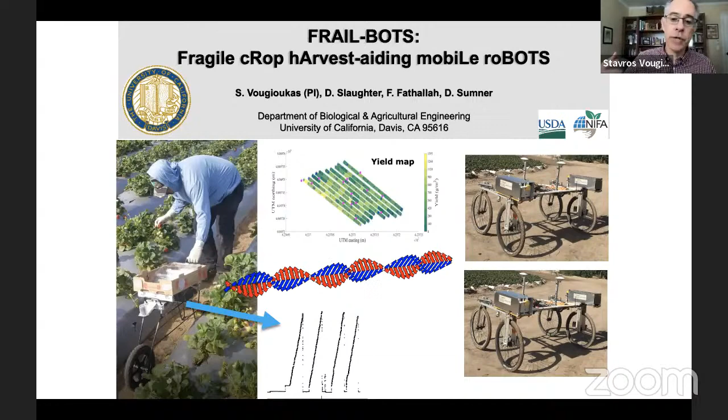Now, when the field computer received the positions and the weights of all those carts from, say, 40 people, it used a hybrid system model of the picker activities internally and used that model in order to do model predictive stochastic scheduling so that it would dispatch the robots to meet the pickers at the right time and basically reduce the waiting time. Remember, here you may have 40 people picking, but you only have 5 robots, for example. So you really need to be very careful on how you schedule those machines.

Right now, our robots provide service that maximizes the crew's efficiency by minimizing the makespan of the overall system. But what if we could alter the software? What if we could change the objective function and offer equal or equitable service? For example, can we provide better service to the people who are slower so that they make more money during the day?

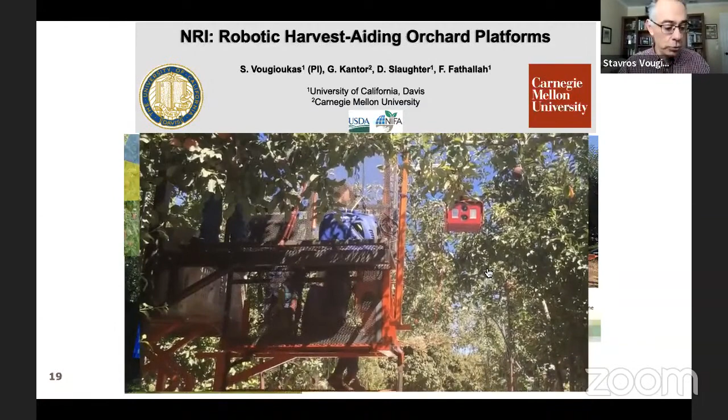A project we are working on now relates to robotic harvesting, not robotic harvest aids. As I said, perception, reaching, grasping, and conveying are bottlenecks in the process. So we are building a multi-arm robot, and we are programming it using scheduling methods from robotics and operations research in order to maximize the throughput of all of those arms that have to be coordinated. And also in collaboration with Carnegie Mellon, we are using multiple cameras to get multiple views of the fruits in order to better estimate their spatial distribution.

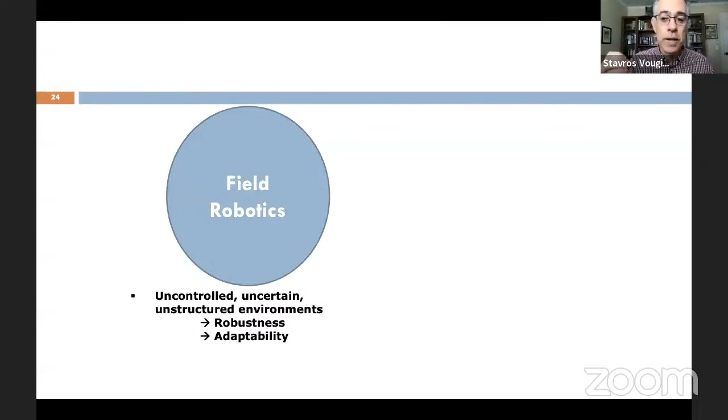Most of these robotic startups will fail, especially the ones that are trying to do robotic harvesting. And the reason is that if you think about field robotics, field robots operate in uncontrolled, uncertain, unstructured environments, and it's all about them being robust and adaptable. Now, on the other hand, if you look at automation, hard automation or flexible automation, those machines operate in controlled, known, and structured environments, but we require from them high throughput and repeatability.

Well, the space of agricultural robotics is actually the intersection of these spaces. We are talking about robots and automation. So these robots must be very gentle, but also be very fast, very robust, very repeatable. And all of that needs to be done in a cost-effective manner because fruits and vegetables are not high value, and also the cost of labor is still very cheap. So this is the great challenge that summarizes what we need to do in agricultural robotics in order to deploy our systems in the fields and come up with solutions to improve agriculture.

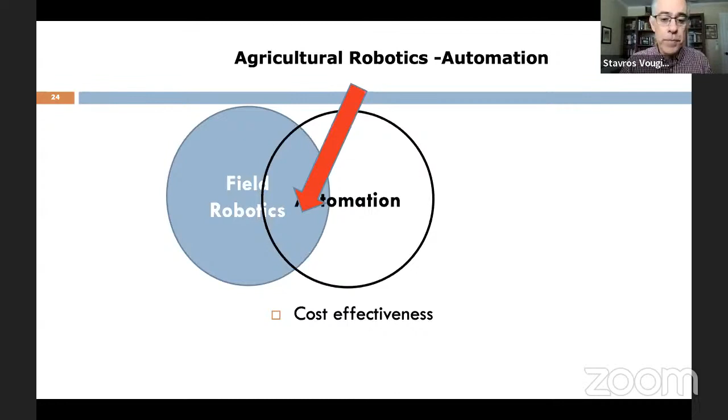Stavros is going to leave now because it's 9 o'clock in the morning in California and he has to go to a class.

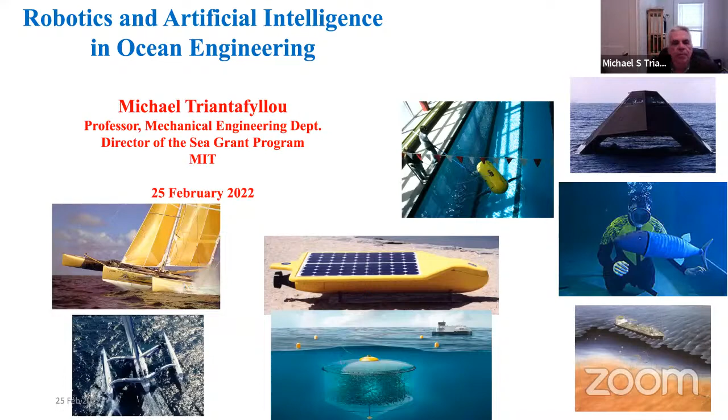Just to give you an idea of how this culture has changed at MIT, a report came in 2015, which pointed out that only 4% of MIT graduates in the 1960s opened a new company, a percentage which went to 8% in the 1990s, and then by 2015 it was 25%. So it's clearly a tremendous change of focus for the graduates of engineering at MIT and everywhere.

MIT is one of many centers for such development. The result you can see, there were about 104,000 living graduates in 2015 from MIT. They had founded 30,000 active companies, which were employing 4.6 million people, producing about 1.9 trillion in income annually, which was just below the annual GDP of France.

So there is tremendous potential, and I would like to take my limited opportunity in the area of ocean engineering, which for Greece is not limited at all because Greece is surrounded by the sea, and there are many opportunities there. So this will be the primary focus today.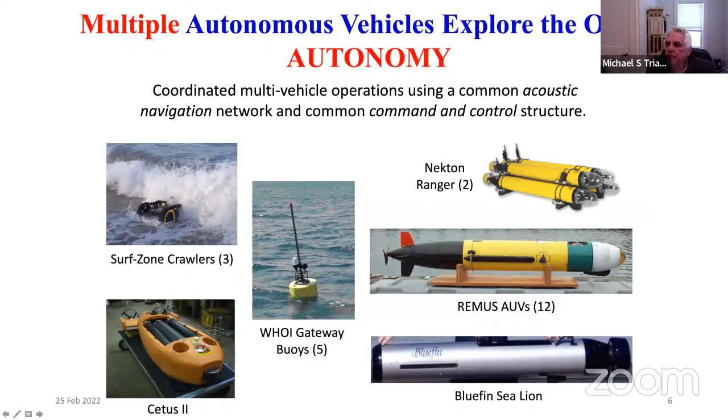Another new market: autonomous surface vehicles, again for observation. Here are some concepts that I'll show you. They started at Sea Grant, which I direct, as I told you, back in 1993. They were very simple models, and they developed as we went along. You see this Scout was also in the Department of Mechanical Engineering, leading to more and more industry-ready designs, to arrive today, where we had recent acquisitions such as Liquid Robotics for $300 million.

This is a very ingenious concept where there is a surface vehicle and a submerged structure. When the surface vehicle moves in waves and the structure at the bottom does not, it produces energy. It's equipped with solar panels, so we can have observation of the ocean over very long scales. And there are several such products right out of Sea Grant that I have observed as they have been created and then grown into larger companies.

So today we are dedicated to autonomy as a concept, and again, concepts such as an autonomous sailing boat, which will be using sails to go for very long distances. A very simple concept, extremely effective, with solar panels to provide the control function, or autonomous surface vehicles to go and collect data, which we need in the ocean, without having to employ humans. So this is an area of tremendous growth, and it will be so for the next 10 years at least.

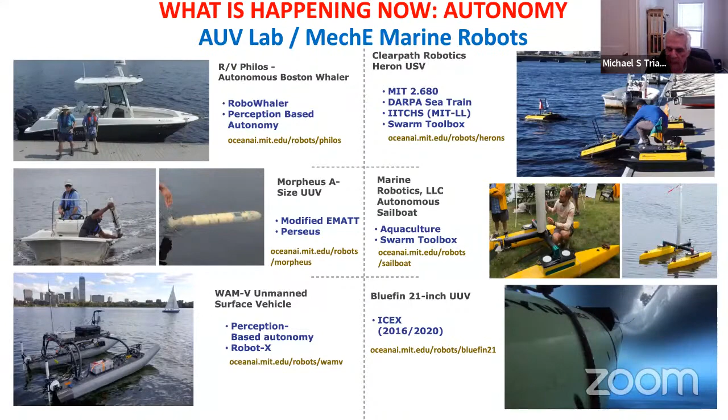The industry for observing the weather is already 7 billion, because there is a great need to know what the weather will be with accuracy. So I'm sure this will become a reality in every ocean, including the Mediterranean.

Another area of potential growth for Greece is the decarbonization of ships. Ships have to reduce emissions by 40% in 2030 and 70% by 2050. And this means we have to come up with completely novel designs. Well, Norway and Australia are already preparing autonomous ships which are all electric. So they have no carbon footprint, but autonomy is essential. And you have to remember, autonomy doesn't mean unmanned. You can have a very much reduced crew.

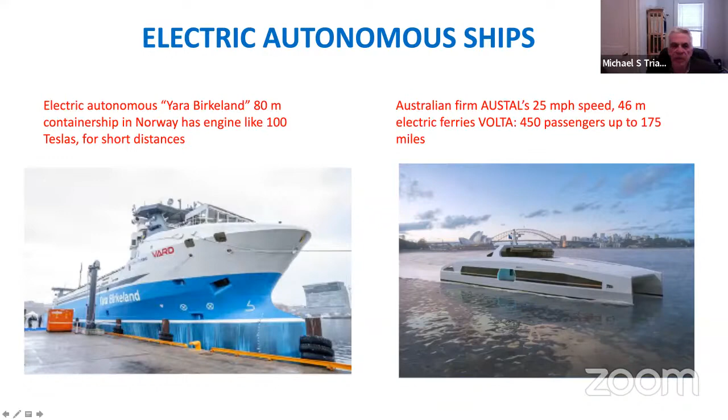So imagine all the ferries in Greece, with distances which do not exceed 150, 200 miles, which is the range of such ships, being replaced by such new concepts. Why leave it to Australia, which is always at the forefront of new concepts? Many of the modern ferries are designed in Australia, and to the Norwegians, who are extremely capable at coming up with such devices. And by the way, there are many concepts to be installed on ships.

Another area of tremendous growth is devices to enjoy the ocean. I'll show you a very short clip from a brand new device. I have been involved with the design of some of these devices. This is an electric hydrofoil surfboard, which can fly above any body of water at speeds of up to 25 miles per hour.

The electric hydrofoil surf. This is a great opportunity. We have oceans which are really conducive to the use of such devices. These have come up in the last 5 years, and there's tremendous growth. They cost something like $7,000 or $8,000, and you can go 25 miles per hour, unheard of before, with a simple handheld control.

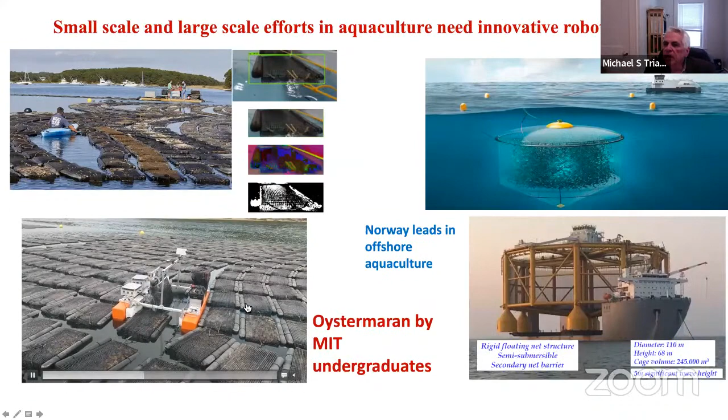So I had my class last year, where I teach electromechanical system design, come up with this robot. And we went down to the farm and demonstrated it can be done. So right now we're talking with companies who are going to commercialize this concept. We have developed all the computer vision and the like to identify the bags. So it has all the paraphernalia needed to be able to do this. But all you need to do is to tune to the customer, to the need, and then the ideas spark up.

There is a special company called HIAS, which has a program called Blue Swell, which is just to provide funding for startups in the ocean. On March 2nd, there is the big meeting where they will announce the winners of this time. We need more of these efforts in Greece as well. It's a cultural change. And talking about cultural change, we need maker spaces.